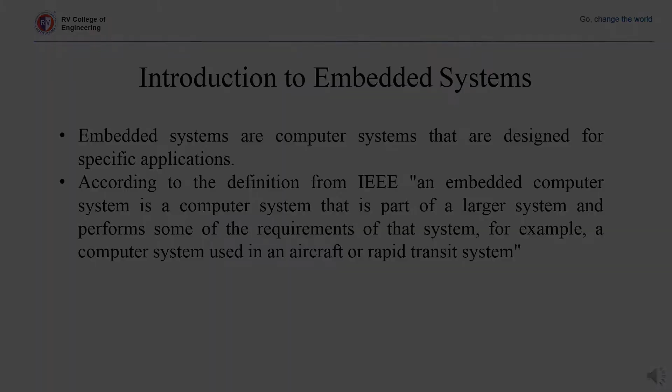Before we move further in the presentation, we'll discuss a little bit about CAN. So, what is this CAN? CAN stands for Controller Area Network. It is a hardware and software communication protocol originally developed by Robert Bosch in 1986 for in-vehicle networks in cars.

Applications of CAN in automobile include engine control communication, body control, and onboard diagnostics. A CAN bus enables microcontrollers in a car to talk to each other without the need of a network host. A typical automobile has dozens of microcontrollers that communicate with each other via various CAN buses.

CAN buses can also be found in other embedded control applications such as factory automation, building automation, and aerospace systems. CAN buses employing twisted wire pairs were specifically designed to be robust in electromagnetically noisy environments.

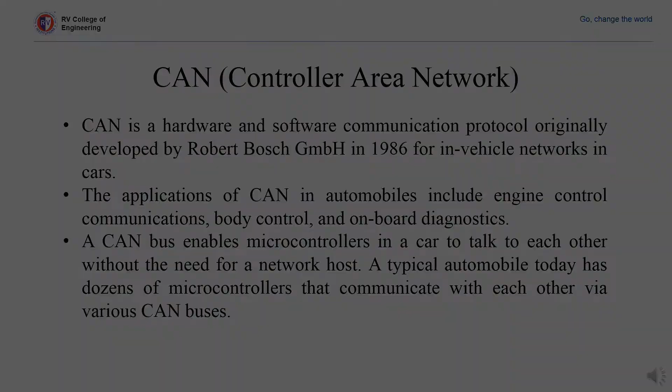Characteristics of the embedded system. Sophisticated functionality, since the embedded systems have to run complex algorithms to perform specific functions within a given time frame. Dependable - an embedded system must be reliable and maintainable.

The embedded systems are always integrated into a device. The entire device could not work if the embedded system does not work or breaks down. The assembly and heat dissipation problems must also be considered. As a fixed part in a device, embedded system must be designed to avoid this problem. Reliability and maintainability are particularly important for them.

Real-time operation and dedicated user interface. Most embedded systems do not use keyboard or large monitor for the user interface. Instead, they use a dedicated user interface consisting of a push button, steering wheel, etc. Users can also control the device, but they cannot modify the programs. The positive side is that it is good for the security of the system.

And real-time efficiency - embedded systems generally have real-time requirements. An embedded system is usually used for controlling of procedures. Embedded systems could set a time frame, and a process must be finished in this certain time frame. This is the real-time requirement. It is a very important feature in assembly line applications. Next, must finish operations by deadlines, and also low manufacturing cost.

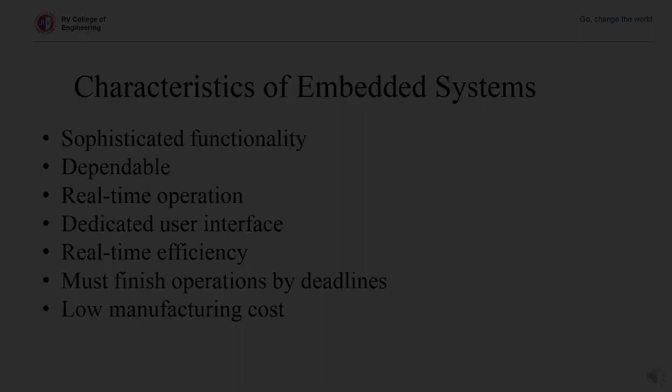Now we will compare the embedded computer systems with personal computer. We got to know that embedded systems are always designed for special equipments, so they must be designed to be suitable for those devices. The first point is CPU.

A general CPU is designed for the needs of a general purpose computer. General CPUs have very high computing speed so that they can compute a task faster or have better performance in multitasking. A general CPU's structure is very similar, but in the case of embedded systems, they always use CPUs that are specifically designed for embedded applications in consideration of energy, size, and cost. So according to the different embedded application, the structure of the embedded CPUs should be dedicatedly designed.

The next point is OS, that is operating system. It is almost impossible that a general purpose computer has no operating system, but the situation in the embedded system is quite different. We do not need operating systems in some particularly easy embedded system functions that can run directly on a hardware platform. It is not necessary to set an operating system on them.

But in other complicated embedded systems, the support of multitask may be required, and then we need a dedicated operating system for them. These operating systems are totally different from what we use in desktop operating systems like Windows.

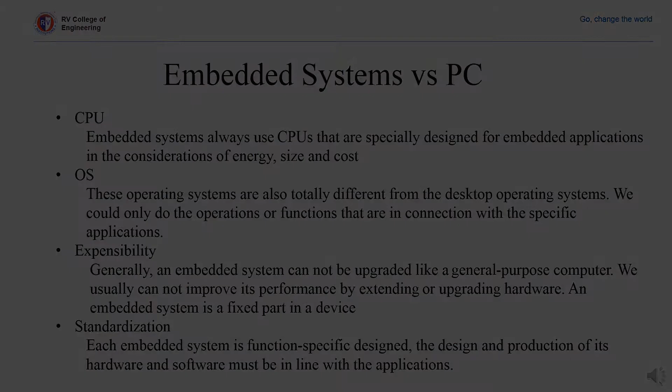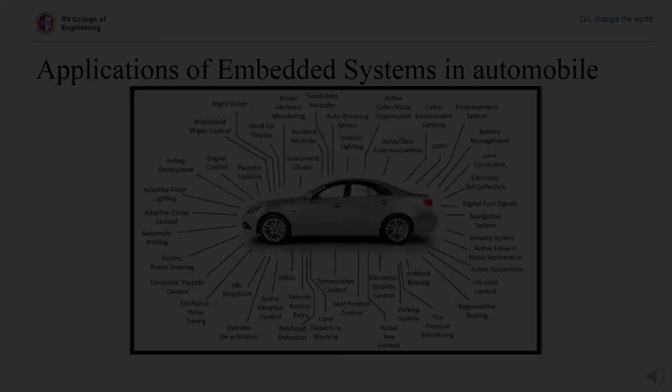I will start with the explanation of the most common embedded system in automobile, that is airbag. We all know that the objective of the airbag, which is deployed when the vehicle suddenly decelerates, is to prevent the vehicle occupants from hitting any hard surfaces and reduce the forces on their heads and upper or lower bodies. Airbags are passive safety devices that are mandatory on all vehicles sold in India.

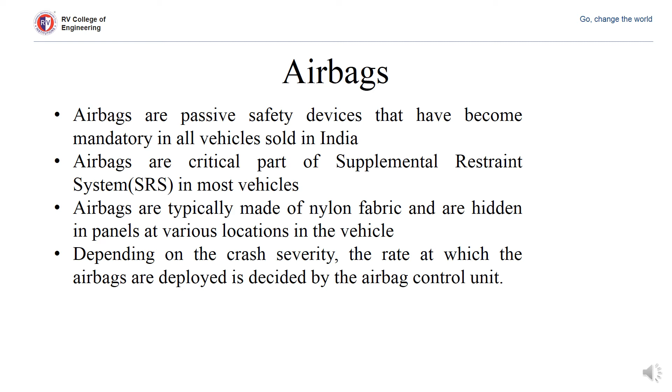Airbags are the critical part of the supplemental restraint system in most vehicles, and airbags are typically made of nylon fabric and are hidden behind the panels at various locations in the vehicle, including the steering wheel. Depending upon the crash severity, the rate at which the airbags are deployed is decided by the airbag control unit.

In the event of a crash, the crash sensor, that is an accelerometer sensor, sends a signal to the airbag control unit. This control unit triggers the inflation device, which generates nitrogen gas by igniting a mixture of sodium azide and potassium nitrate. The time between the crash detection and the complete deployment of the airbag is approximately 0.05 seconds. One thing we have to note here is that the airbag deployment speed is about 200 miles per hour, which itself can be harmful in certain areas.

This has given rise to the adaptive airbag system that employs multiple inflators to produce either low-level or high-level deployments. These systems can adjust the airbag pressure depending upon factors such as seat position, size of the passenger, crash severity, or seatbelt use.

In 2012, Volvo became the first automotive manufacturer to introduce what is called the pedestrian airbag system in its V40 model. It uses a pedestrian contact sensing system. When impact with the pedestrian is sensed, the hood opens from the back and an airbag is inflated over the windshield wiper area.

Now we will see ABS, which stands for Anti-Lock Brake System. These systems play a significant role in improving the safety of modern vehicles. Anti-lock brake system prevents wheel lock-up by modulating the braking pressure. In slippery road conditions or on smooth surfaces, a driver may hit the brake so hard that one or more wheels lock, and it begins to skid over the surface. This results in longer stopping distance or maybe a loss of stability and leads to vehicle instability.

ABS systems monitor the wheel speed in real time and regulate the brake pressure automatically in order to prevent wheel lockup and improve the driver's control of the vehicle. They are now often paired with other systems such as electronic stability control and traction control to further increase vehicle control and driver safety. The main components of these systems include regular brake parts, wheel speed sensors, and a hydraulic modulator operated by an electronic control unit. This figure shows the architecture of the ABS system.

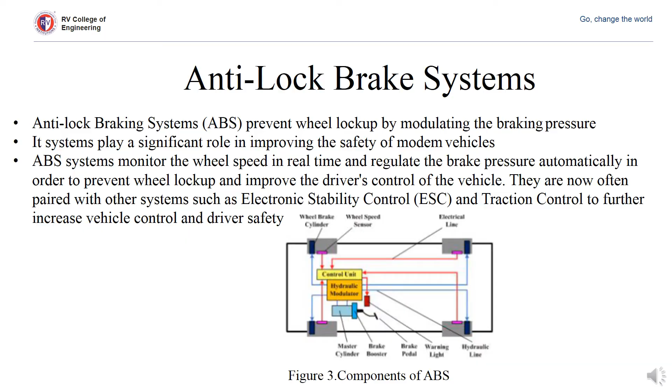This figure shows the schematic of the anti-lock brake system.

When operating in normal condition, the outlet valve C of the hydraulic modulator is closed and the inlet valve stays open until the pressure reaches the desired value. Then both the inlet and outlet valves remain closed to hold this pressure and provide sufficient brake torque for wheel brake cylinders. Once the control unit detects any excessive wheel slip, the corresponding outlet valve is opened to release the pressure to the accumulator and prevent possible wheel lockup.

The excess brake fluid is returned to the master cylinder through the return pump. After the wheel slip returns to normal, the valve solenoids are de-energized and the hydraulic modulator resumes the regular braking process. Another important term in the anti-lock brake system is slip ratio.

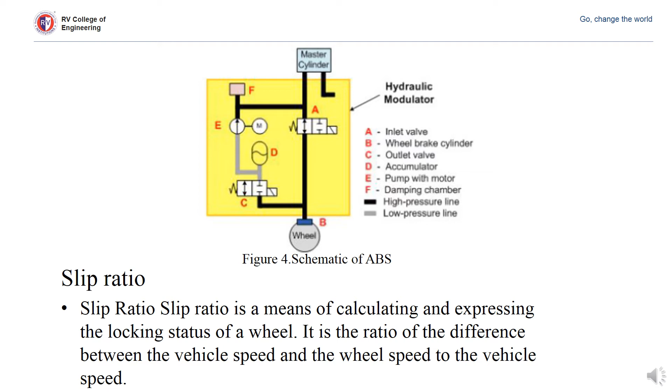Slip ratio is a means of calculating and expressing the locking status of the wheel. It is the ratio of the difference between the vehicle speed and the wheel speed to the vehicle speed. For example, when the vehicle is running normally on an ideal road surface, the slip ratio is 0. When the wheels are locked, the slip ratio is 1. During braking, as the slip ratio rises, the ABS system maintains an ideal slip ratio of 0.1 to 0.3 based on road tire friction characteristics. In this way, the vehicle maintains a maximum deceleration without a total loss of steering capability.

Now we'll see another embedded system that is most commonly used, that is electronic stability control system. It has many names such as vehicle dynamic control, dynamic stability control, electronic stability program, etc. It is one of the most significant active safety systems in modern automobiles. The main function of this system is to improve the handling performance of the vehicle and prevent possible accidents during severe driving maneuvers.

Generally, these systems stabilize the vehicle by applying the necessary yaw moment and regulating the slip angle of the vehicle based on comparison between the vehicle state and driver's demand. Some electronic stability control systems also reduce power from the engine during excessive steering.

A vehicle may go in a direction different from what the steering wheel position indicates when the driver tries to turn very hard or turn on a slippery road. What happens in this situation? The vehicle may understeer or it may oversteer. In an oversteer situation, the vehicle turns more than the driver intended because the rear end loses traction and slides out. Understeer is when the front loses traction and the vehicle turns less than the driver intended.

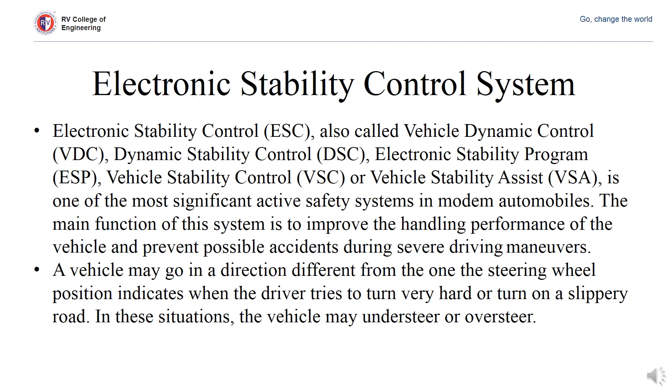This figure shows the architecture of a typical stability control system, incorporating three fundamental elements: the driver, the vehicle, and the environment. In the normal control loop, the driver detects the deviation of the vehicle from the current road trajectory and corrects it through the steering system.

When the electronic stability control system senses that a driver is about to lose control of the vehicle, it generates the necessary yaw moment automatically based on the difference between the driver's demand and actual vehicle state, and helps pull the vehicle back to the desired trajectory.

Adaptive cruise control extends the existing cruise control systems to include a headway sensor that monitors the distance between the vehicle and the vehicle ahead. The system is also sometimes called active cruise control or intelligent cruise control.

There are two types of headway sensors. One is the radar sensor that employs microwave signals, and another is a LiDAR sensor that employs a laser diode to produce infrared light signals. Both these types of sensors send a signal and monitor the time required for the signal to reflect off the object ahead.

When these systems determine that there is a need to slow the vehicle, they may use engine, transmission, or brakes to decrease the vehicle's speed and maintain a safe following distance. Many systems limit the maximum deceleration to no more than 3 meters per second squared.

These systems usually have a user interface, typically both visual and audible indications provided to the driver depending on the severity of the situation. Adaptive cruise control systems are evolving rapidly and are currently available on many mid to high-end passenger cars as well as many heavy-duty commercial trucks.

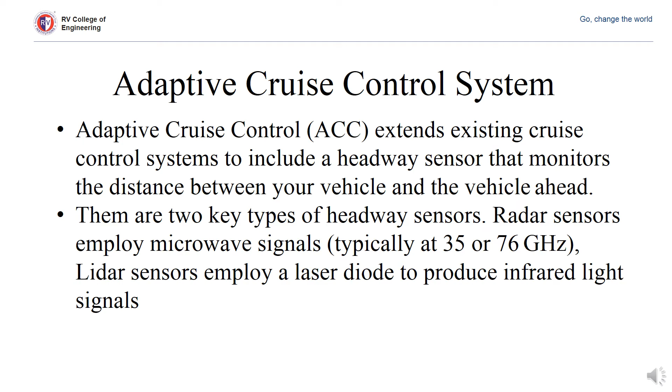This figure shows the principle of operation of the adaptive cruise control. When there is no object ahead of the host vehicle, the vehicle tries to move at a constant speed. When the sensor in the host vehicle detects any object ahead...

It continuously measures the distance between the host vehicle and the target vehicle and tries to maintain a constant following interval, that is, it tries to maintain a safe distance from the target vehicle.

The embedded systems we have seen till now are like an add-on to a traditional vehicle. But there is a trend in the automotive industry towards eliminating mechanical and hydraulic control systems and replacing them with electronic controls. Many traditional mechanical components can be eliminated, such as shafts, pumps, hoses, fluids, etc., which reduces the weight of the vehicle and improves efficiency.

Electronic controls can also improve safety by facilitating more automated control functions like stability control. They also enhance the flexibility of the automotive system, making it easier to modify or upgrade vehicles. Electronic controls improve handling, enable better fuel efficiency, and exhibit better response times in emergency situations.

Such systems are called drive-by-wire. This has already been implemented in the aerospace industry, where the traditional linkage control system is substituted with the fly-by-wire system. Drive-by-wire consists of three main systems: steer-by-wire, throttle-by-wire, and brake-by-wire.

The first one is steer-by-wire. Steer-by-wire systems do not have a direct mechanical connection between the steering wheel and the wheels of the vehicle. Instead, turning the steering wheel sends instructions to an electronic control unit. The control unit actuates an electric motor that controls the steering angle of the wheel.

The second one is throttle-by-wire. Throttle-by-wire is an automotive technology widely used on vehicles today. It replaces the traditional throttle linkage with an accelerator pedal position sensor and an electronically operated throttle. It provides several advantages over mechanical systems, such as eliminating the binding problem in mechanical linkages, preventing the throttle from sticking, and allowing automated control of the throttle that helps reduce emissions and improve fuel economy.

The ECM actuates a servo motor which actuates the butterfly valve in the throttle assembly. The position of the throttle is continuously monitored, and the information is conveyed to the ECM using a feedback unit. Thus, the throttle is controlled using an ECM.

Brake-by-wire is an automotive technology that completely eliminates traditional mechanical and hydraulic components and replaces them with electronic sensors and actuators to control the brakes in vehicles.

Some advantages of brake-by-wire systems are reacting more quickly, resulting in shorter stopping distance and time, and the loss of mechanical systems results in noiseless operation and elimination of vibration, reducing the overall weight of the system and thus improving fuel efficiency. We have to note that brake-by-wire systems are still under development and cannot be found on passenger cars currently in the market.

The pressure is monitored and a signal is sent back to the brake computer, which applies a mechanical force to the pedal as feedback to the driver.

We have to note that the complexity of the drive-by-wire system is a concern to many automotive customers, who worry about the failure of software and possible electronic malfunctions in sensors, resulting in car accidents and passenger injury.

As I said at the start of the explanation of drive-by-wire systems, these systems have been used by commercial aircraft for many years and have an excellent safety record. Ultimately, the enhanced safety features and other benefits of automated electronic controls are expected to outweigh concerns about the complexity and reliability of these controls, and drive-by-wire systems will be widely used in automotive designs.

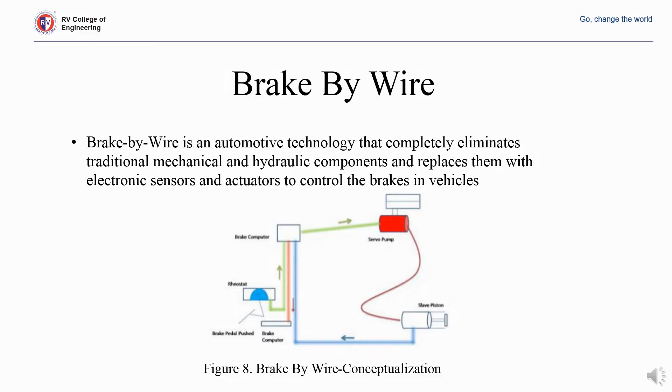We will now see automatic rain sensing wipers embedded system. We all know it's one of the most emerging embedded systems in recent automobiles.

We all know a windshield wiper is a device used to remove rain from the windscreen. Almost all motor vehicles, including trains, aircraft and watercraft, are equipped with such wipers, which are usually an essential requirement. A wiper generally consists of an arm pivoting at one end with a long rubber blade attached to the other. The blade is swung back and forth over the glass, pushing water from its surface. The speed is normally adjustable with several continuous speeds and often one or more intermittent settings.

Most automobiles use two synchronized radial type arms. It takes a lot of force to accelerate the wiper blades back and forth across the windshield so quickly. In order to generate this type of force, a worm gear is used on the output of a small electric motor.

So why do we have to go for an automatic wiper system? In present automobiles, the number of facilities is much higher. The driver has to concentrate on the road while driving, and with increased traffic, things might get frustrating. Features in the car like GPS to trace the route, the music system, and the air conditioning system may drive away the attention of the driver.

Thus an effort is made to reduce the effort put by the driver in controlling the speed of the wiper and put more concentration on his driving. Since the system is already put in higher end cars and has been successful in working, an effort has been made to reduce the cost of the system so that it can be used in more economic cars, and also a common man can enjoy the benefits of it.

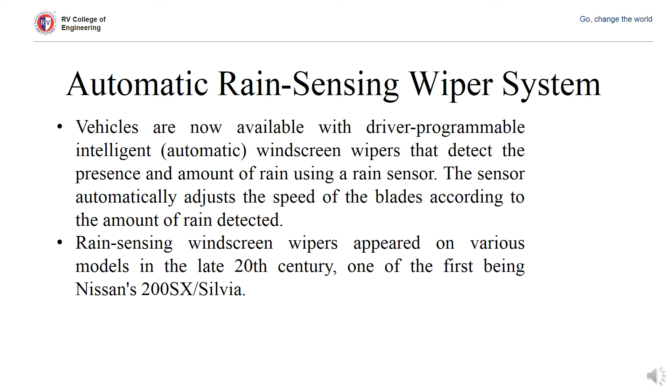The sensor is fixed in the vehicle glass. A conductive touch sensor might be used. It senses the rainfall and gives a control signal to the control unit. Then the control unit activates the wiper motor automatically, so the blades remove the rain droplets from the windscreen.

The next embedded system is head-up displays. Head-up displays were designed originally to present at the usual viewpoint of the pilot the main sensor data during an aircraft mission, because placing instrument information in the forward field of view enhances the pilot's ability to utilize both instrument and environmental information simultaneously. The first civilian motor vehicle that had a monochrome head-up display was released in 1988 by General Motors.

This was a technological improvement over the head-down display interface, which is more commonly used in the automotive industry. The head-up display reduces the number and duration of the driver's sight deviations from the road by projecting the required information directly onto the driver's line of vision.

A car head-up display system is formed by three main parts. The first is the combiner, the surface on which the image is projected. The second is the projector, which generates the image and directs it towards the combiner. The last one is the computing unit, which processes data from different sources and handles the projection.

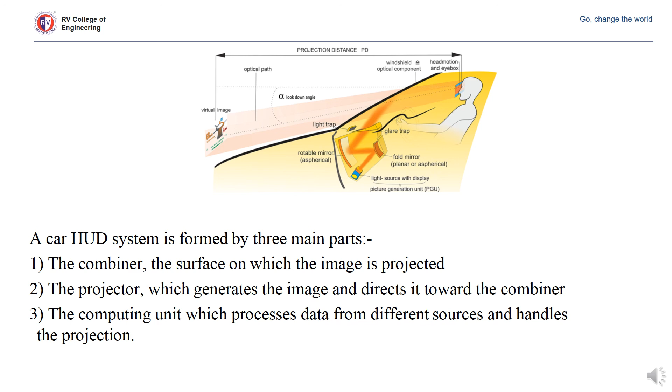The advantages of using head-up displays are: the head-up display will replace the indicator cluster in the dashboard on a common car, also known as head-down display. A head-up display is a device that can help avoid several factors that cause accidents on the road, such as human error, vehicle error, and accidents that cannot otherwise be avoided.

To upgrade efficiency and safety, a head-up display system must provide drivers with large amounts of information from many categories. The head-up display allows taking advantage of advances in technology and the communication process between the driver and the car. Using the head-up display causes less mental stress for the driver than the head-down display.

As head-down displays are integrated into vehicles' control dashboards, by using head-up displays the frequency and duration of glances towards the displays are reduced by presenting information directly on the windshield in the driver's field of vision.

As we have seen in this presentation, more and more equipment in automotives are changing from mechanical systems to electronic systems. The electronics revolution has influenced almost every aspect of automotive design, including the powertrain, fuel combustion, crash protection, and the creation of a comfortable cabin and nearly wireless environment.

The development of embedded systems greatly facilitates the comfort of people's lives, changes our view of things, and has a significant impact on society. On the other hand, even though embedded system technologies are becoming more and more mature, there are still many challenges in technique, and there will be more with the ever-growing speed and reliability demand from the market.